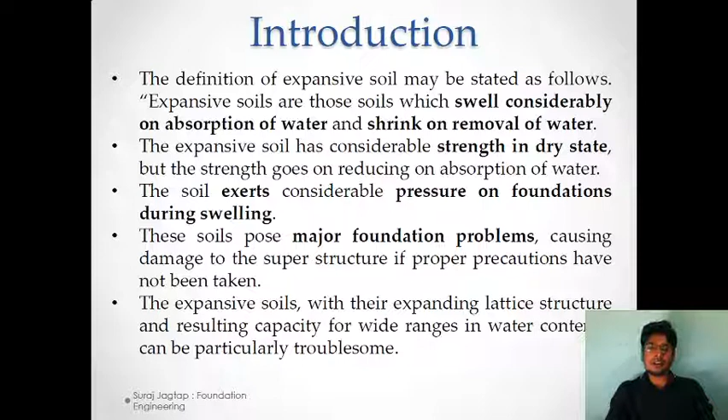The expansive soils, with their expanding lattice structure and resulting capacity for wide ranges in water content, can be particularly troublesome. Settlement due to shrinkage and heave due to swelling causes structural instability. This problem is magnified in hydraulic structures. The amount of volume change in expansive soil is related to initial dry density and water content, amount of clay fraction and type of clay minerals.

Characteristics of shrinkage and swelling due to moisture movement are hence dangerous. Shrinkage cracks formed are also known as tension cracks. If swelling is checked or restricted, high swelling pressure acting in the upward direction will be induced, resulting in several cracks in structures. These soils have very poor bearing capacity, ranging from 5 to 10 tons per meter square.

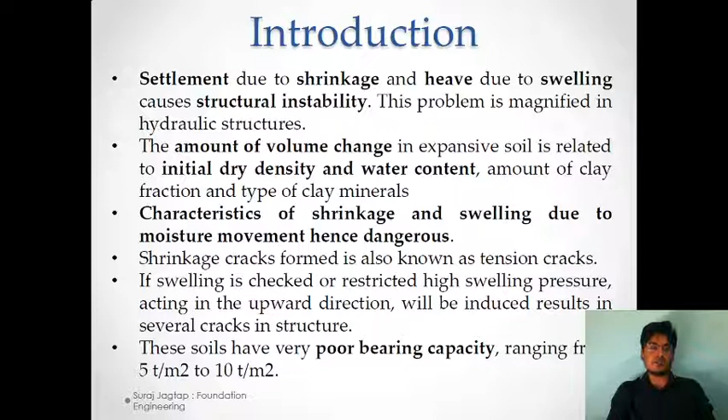So this was a brief introduction to black cotton soil and the properties which are exhibited by those soils, and the adverse effect or negative impact of those properties on the structural behavior and stability of the structure.

Now there are some tricks or tools by means of which we can identify which type of soil, or whether a site consists of black cotton soil. First, the capacity of a soil to swell depends upon the type and amount of clay minerals and exchangeable bases. There are three groups of minerals listed, and for identification of expansive soil, different field and laboratory methods are available, using different terminologies, which will be discussed further.

In practical conditions, the expansive soil in field can be identified by the cracking pattern of the soil in summer. As in summer the water content is reduced and the soil becomes dry, some cracking patterns can be seen on the surface of the soil, by means of which we can distinguish whether the particular soil is an expansive soil, or black cotton soil, or not.

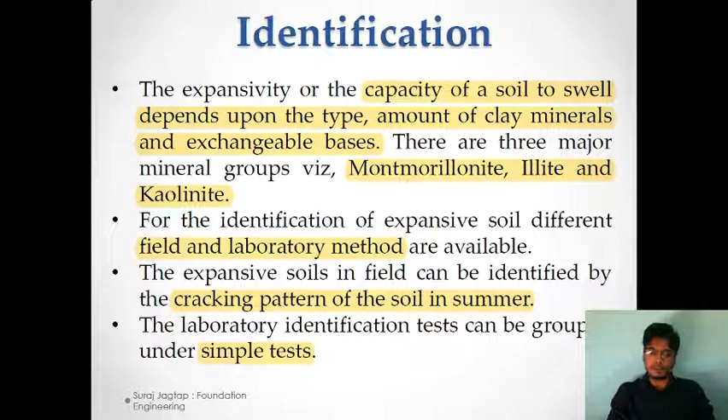The laboratory identification test can be grouped under simple tests. So when we are talking about simple laboratory tests, the term free swell test, or free swelling, is important. In this free swell test, the test is performed by slowly pouring 10 cc of oven dry soil passing a 425 micron sieve into a graduated 100 ml cylinder filled with distilled water.

The volume of settled and swelled soil is read after 24 hours from the graduations of the cylinder, and the percentage of free swell is calculated by the following formula. The result of this formula gives us the coefficient for the free swell test.

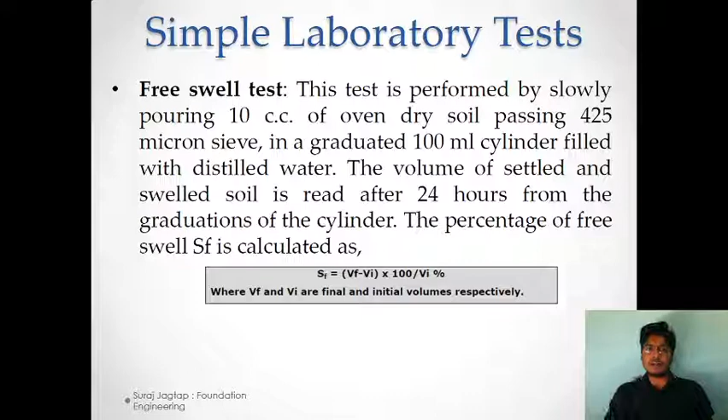Now, depending upon the criteria of the free swell test, we have the differential free swell test, which is a modification of the free swell test we have seen earlier. This differential free swell test gives us a coefficient known as DFS coefficient from the DFS test.

In this method, two samples of oven dry soil passing a 425 micron sieve and weighing 10 grams each are used, whereas in the case of the free swell test, only one sample was used. In this case, we are having two samples.

One sample is poured slowly into a 50 ml graduated glass cylinder filled with kerosene, and the other sample is poured into another 50 ml graduated cylinder filled with distilled water, as in the case of the free swell test. Both the cylinders are left for 24 hours and the respective volumes are noted, and the coefficient for DFS is calculated by the following formula.

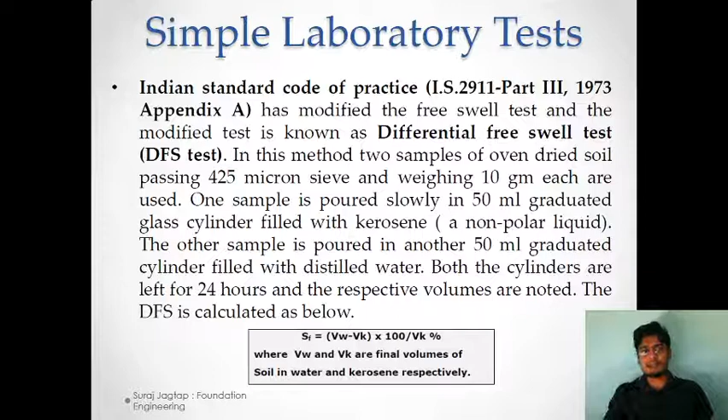The degree of expansiveness of soil and consequent damage to the structure with light loading may be qualitatively judged as described below. Depending upon the DFS value, which is the differential free swell test value, if it is less than 20%, the degree of expansiveness is low, and the soil can be treated and used for further construction.

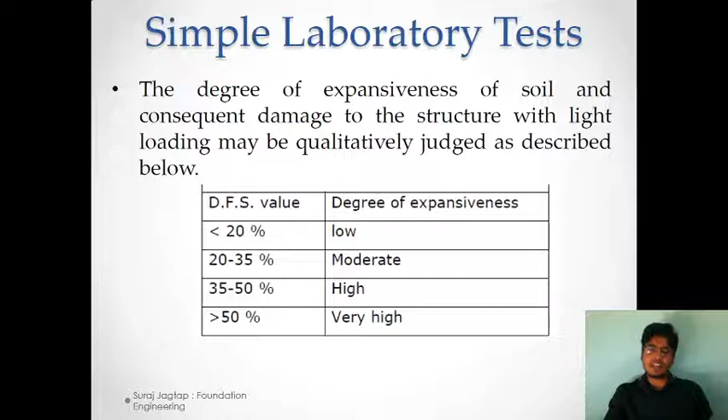But if it ranges from 20 to 35%, the degree of expansiveness is moderate, and for 35 to 50% or greater than 50%, it can be termed as high, which needs certain treatments or a specialized type of foundation to be used in this case of expansive soil.

Some of the engineering properties which can be a major troublesome issue in construction of foundation in expansive soil are: the first one is the theory of swelling. It is common observation that when swelling soil comes in contact with water, the volume of soil increases, and this phenomenon is known as swelling.

This is to be measured, meaning when swelling occurs in the soil, it exerts a swelling pressure from beneath the foundation. So measurement of this swelling pressure is important.

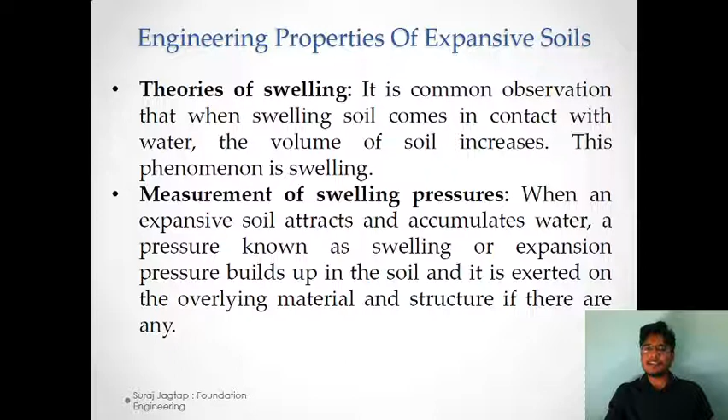When an expansive soil attracts and accumulates water, a pressure known as swelling or expansion pressure builds up in the soil and is exerted on the overlying material and structure, if there are any.

This swelling pressure is defined as: in common terms, if a swelling substance is tightly enclosed in a vessel with a wall permeable to a swelling solvent, and the latter is allowed to diffuse into the vessel, the dilation tendency, which is the change in volume tendency of the soil solvent gel, gives rise to a pressure called swelling pressure. The two commonly used methods for measuring swelling pressure are the constant volume method and the constant pressure method.

There are many methods which can be used for calculation or measurement of swelling pressure, but here we are discussing only these two: the constant volume and constant pressure methods.

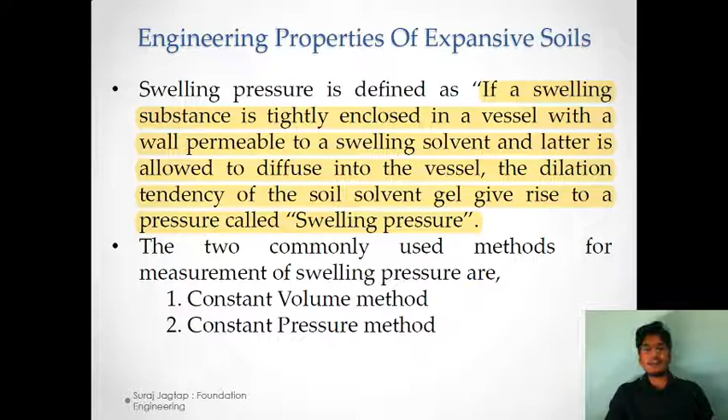Coming to the measurement of swelling pressure using the constant volume method. In this, the soil is mixed with an appropriate quantity of water. After the maturing period, the soil is placed in the mold. The bulk density and water content of the specimen is determined by standard methods. The specimen is covered with porous stone and filter paper.

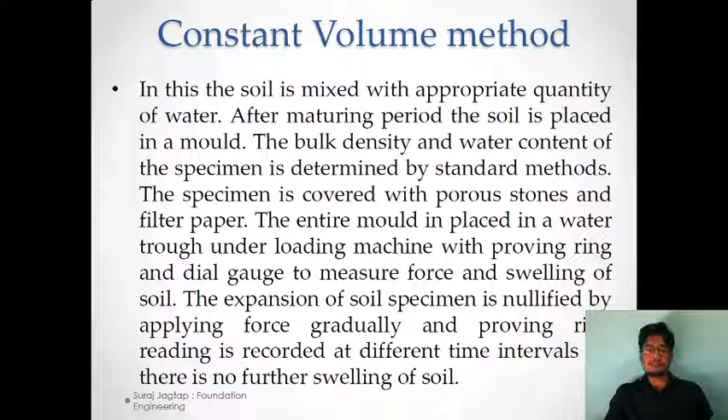The entire mold is placed in a water trough under loading machine with proving rings and a dial gauge to measure force and swelling of soil. The expansion of the soil specimen is nullified by applying force gradually, and proving ring readings are recorded at different time intervals till there is no further swelling of soil.

Pressure intensity is calculated from proving ring readings and specimen area. A pressure versus time graph is plotted. The maximum pressure intensity gives the swelling pressure of soil for a specific dry density and water content that was earlier tested for the specimen used under testing. The following shows the instrumentation used for this constant volume method.

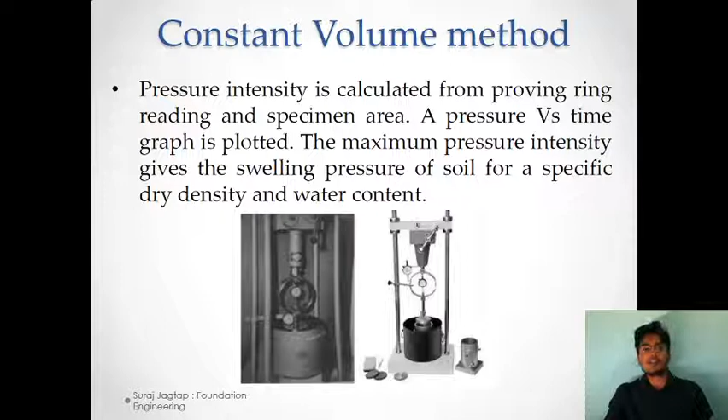Coming to the constant pressure method. In this method, a minimum of 3 identical soil samples are subjected to 3 different load intensities and allowed to saturate and swell or consolidate. The load intensities are so selected that the soil swells under the lowest load intensity and consolidates under the maximum load intensity.

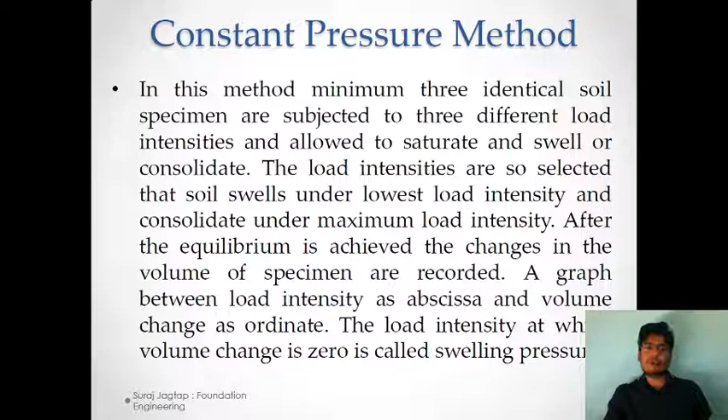After equilibrium is achieved, the changes in volume of the specimen are recorded. A graph is plotted between load intensity as abscissa and volume change as ordinate. The load intensity at which volume change is zero is termed as the swelling pressure.

Now here are some of the engineering problems when we go for construction in black cotton soil. The first one is deep excavation for foundation, which is to be done in case of black cotton soil to find out the hard strata for a firm base for foundation.

Black cotton soils are residual soils resulting from weathering of igneous rock. The thickness of this soil stratum can be as high as 3 to 10 meters. Laying the foundation on a firm, non-swelling stratum involves deep excavation in stiff clay and increases the cost of construction. So this was the first engineering problem which we come across while constructing in black cotton soil.

Second is the assumption of low bearing capacity. The correct estimation of allowable bearing capacity of black cotton soil is complicated by various factors such as swelling pressure, groundwater table variation, site conditions, and so on.

This leads to assumption of lower bearing capacity. But if the probable swelling is higher than the assumed bearing capacity, the foundations are subjected to differential settlements.

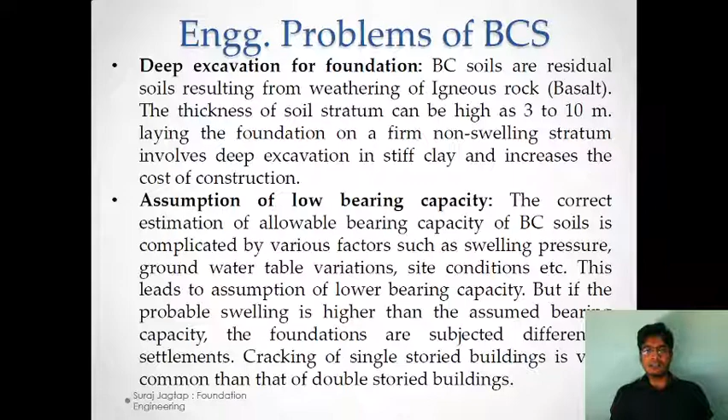Cracking of single-storied buildings is more common than double-storied buildings in case of differential settlements.

Coming to the next problem, non-uniform swelling or shrinkage. The equilibrium water content is not the same below the foundation. This leads to differential settlements and diagonal cracks in the masonry superstructure.

The next problem is the high cost and low reliability of rehabilitation. Remedial measures for damaged structures are costlier and not reliable in the long term. Hence, prevention is better than cure.

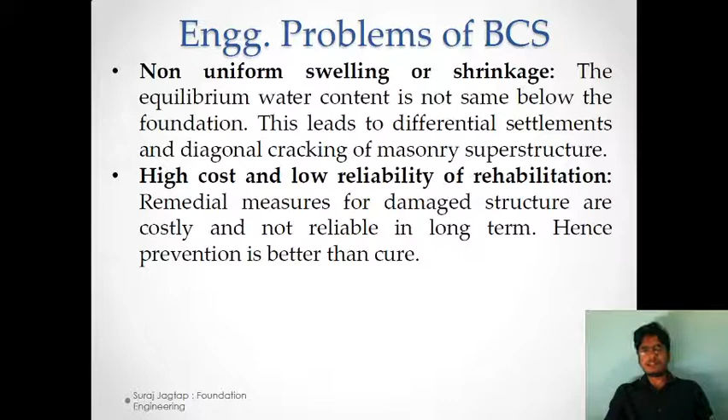So these are some of the engineering problems which we face while constructing on black cotton soil.

To avoid these problems, the construction techniques for foundations in expansive soil are as listed. The first one is the removal of the entire expansive soil.

The first and simplest method is to remove the entire layer of expansive soil up to the firm, non-expansive strata. But this is only applicable when the depth of expansive soil available is to the extent which can be removed. If the depth of expansive soil is greater, it can increase the cost of the project.

The second method is to provide a cushioning layer between the bottom of the foundation and the top of the soil. The cushioning layer is a granular soil that allows the swelling of soil to penetrate its voids.

In case of expansive soil, the cushioning layer provided between the bottom of the foundation and the top of the soil is nothing but sand. Sand can provide us a moderate void ratio in which we can sustain the swelling of the soil, and the differential settlement occurring due to swelling can be reduced.

A raft or mat is a combined footing that covers the entire area beneath the structure and supports all the walls and columns. This type is used when the allowable soil pressure is low and building loads are heavy.

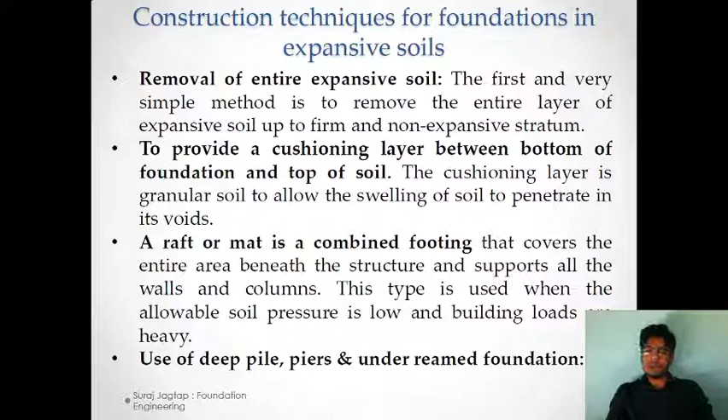Coming to the underreamed pile foundation. When we talk about the underreamed pile foundation, it is nothing but a method to increase the bearing capacity of the soil or to sustain the loading in case of black cotton soil. So in both ways we can consider the underreamed pile.

The best method of foundation in expansive soil is a foundation anchored at the stable zone of the ground, where the moisture variations are negligible. This was observed from the performance of cast-in-situ piles with enlarged bases, termed as underreamed piles.

A pile having one bulb at the base is known as a single underreamed pile. The load bearing capacity of the pile can be increased by increasing the number of bulbs at the base. The diameter of underreamed piles varies from 20 cm to 50 cm, and the bulb diameter varies from 2 to 3 times the diameter of the pile.

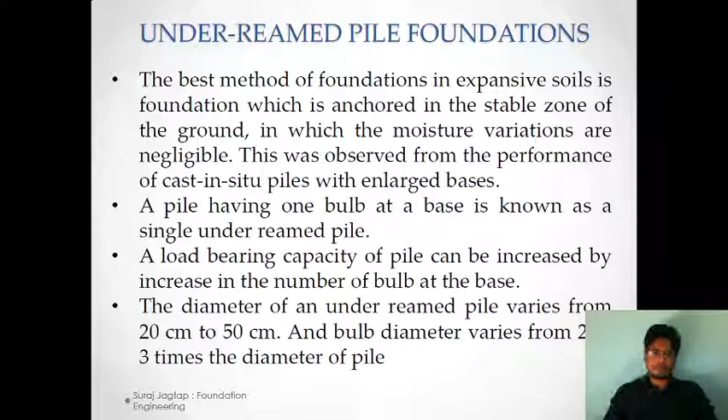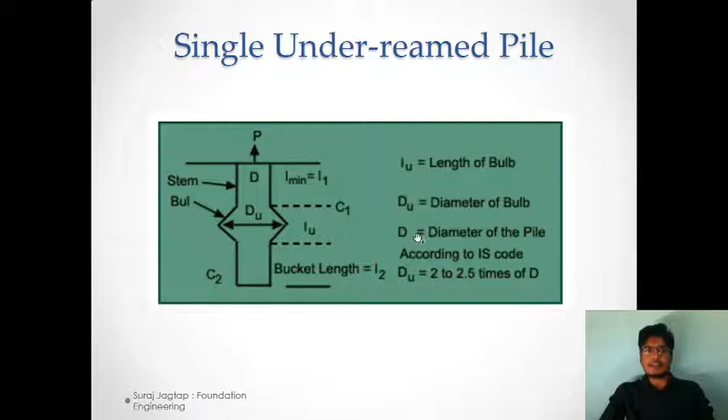Here is the graphical representation of a single underreamed pile, in which we have the pile known as the stem, the diameter of which is considered as d. If we are providing an underream or bulb, the diameter of that bulb, du, should be at least 2 to 2.5 times the diameter of the stem. So this is all about the single underreamed pile.

When we come to the multiple or double underreamed pile, the same terminology is used, where d is the diameter of the stem and du is the diameter of the bulb, which should be in the range of 2 to 2.5 times the diameter of the stem. The vertical spacing between two bulbs, center to center, should be at least 1.25 to 1.5 times the diameter of the bulb, and the vertical length of the bulb is 1.5 times the diameter of the stem.

So this is all about the double underreamed pile geometry. The working or function of the underreamed pile can be explained as bearing capacity at the toe as well as on the circumference of the bulb. This additional bearing sustained by the surface of the bulb can increase the maximum load sustaining capacity of the pile.

So it is stated that if the bulbs are more in number, then we can sustain more external loading, or we can apply more load on the pile.

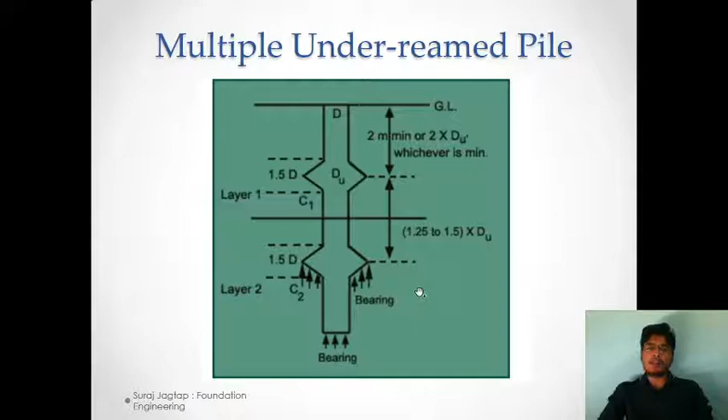Important notes about the underreamed pile are as below, consisting of the physical as well as load carrying capacities, and important assumptions or geometrical parameters. By providing an underream bulb, the ultimate load capacity of piles can be increased significantly.

The ultimate load bearing capacities of the underream pile with angle of underream bulb of 45 degrees and 0 degrees are almost the same. Three or more underream bulbs are advantageous only when the spacing ratio, s by du, is 2 or less. When s by du is greater than 2, multi-underream piles do not have a specific advantage.

The ultimate load bearing capacity of piles is maximum when the spacing between the two underream bulbs is 2.5 times the diameter of the underream bulb, which we have discussed earlier.

It appears that the spacing between the two underream bulbs suggested in IS is 1.25 to 1.5 times, and this is not the optimum. The expression suggested by IS can be used for predicting the ultimate load carrying capacity of an underream pile with the spacing ratio s by du less than 2.5.

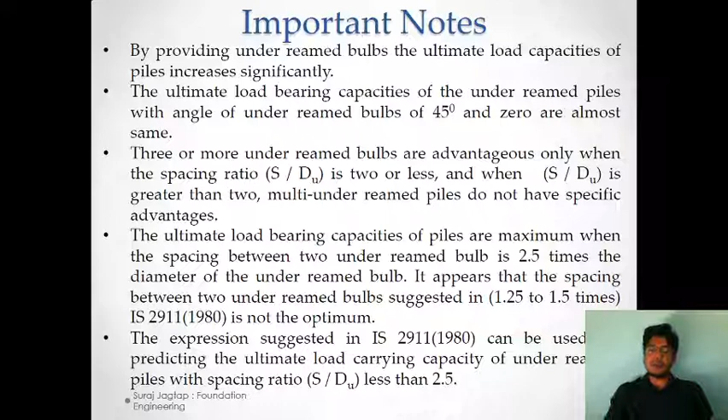Now coming to the bearing capacity of the underream pile, it can be calculated using the same concept used in calculating the ultimate bearing capacity of a single pile, wherein the ultimate bearing capacity of an underream pile can be calculated by the addition of the resistance offered by the tip and the resistance offered due to the skin friction or skin resistance.

So here are some expressions which can be referred to for calculation of the bearing capacity of the underream pile in place, for single pile toe resistance and skin resistance, taking into consideration that the soil in which we are calculating the ultimate bearing capacity of the underream pile is a clayey soil.

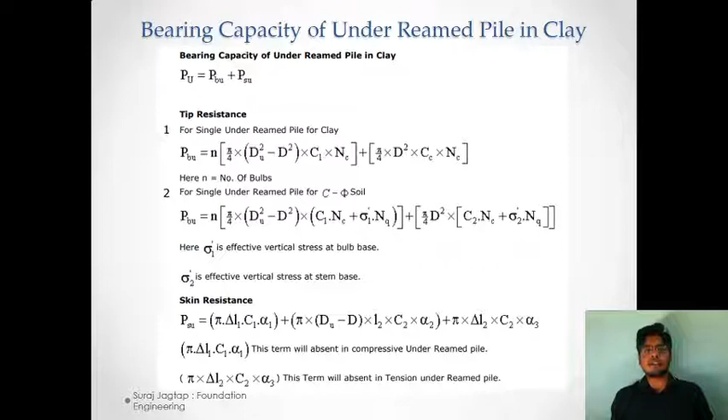So this was all about a brief summary of foundation in black cotton soil: the errors which are occurring, the terminologies which can help, and the method by which we can construct the foundation. Any issue in this regard can be posted below.

And the last one is the method of construction of the underream pile. It is the same as that of a single pile which can be driven into the ground. The only difference is that we are having a bulb over here, whereas in the case of a simple pile, it is a single pile with constant diameter.

So the equipment for the construction of the pile consists of auger boring guide, spiral auger with extension rod, and under-reamer with bucket and concreting funnel, etc. In this method of construction of the underream pile, only the under-reamer with bucket is the extra factor which makes the difference between a simple pile and an underream pile.

The auger should be rotated slowly with a constant downward pressure and taken out when it is full with soil. The holes for casting piles in the ground may be bored using a hand auger as well. For deeper boring, the length of the auger can be increased by adding suitable extension rods or pipes.

In sites where the subsoil water table is high, bentonite slurry is used to retain the sides of the borehole against collapse. For extra information, bentonite slurry is also used in tunneling for finishing work of a tunnel.